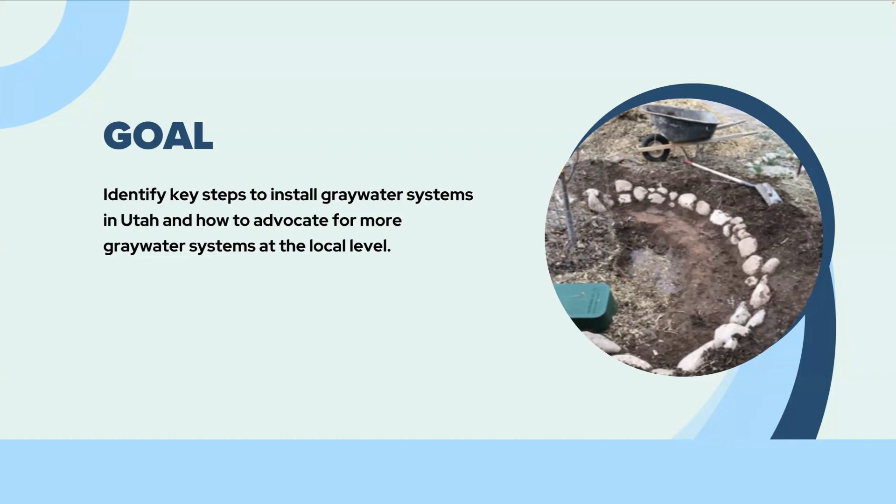Okay, so when you walk away from this talk, we're hoping that you'll be able to articulate what gray water is, list major aspects of Utah's code. Of course, you won't memorize the code, but maybe some major parts that are important to know about our code in Utah, which was revised in 2020 and simplified, made much more accessible for people right in the peak of the pandemic. And for you to be able to describe benefits and drawbacks of gray water systems based on our experience, visualize a branch drain system, which is what my system is in my household, recall major best management practices, and be a local gray water leader. So with that, I'll pass it over to Orion here to talk some about the gray water code.

All right. So within the health department, we are charged with regulating on-site wastewater systems, and gray water systems fall into that regulation. So there's R317-4, which is on-site wastewater systems. Most of you are going to know of them as being called septic systems, but gray water systems are quite a bit different from that. With the gray water system, and we'll talk about it more, what fixtures can go out there and whatnot, but gray water is a way to divert some of the water that would normally be going into the municipal sewer system. We can talk about septic systems later if we want to, but so that regulation falls into place.

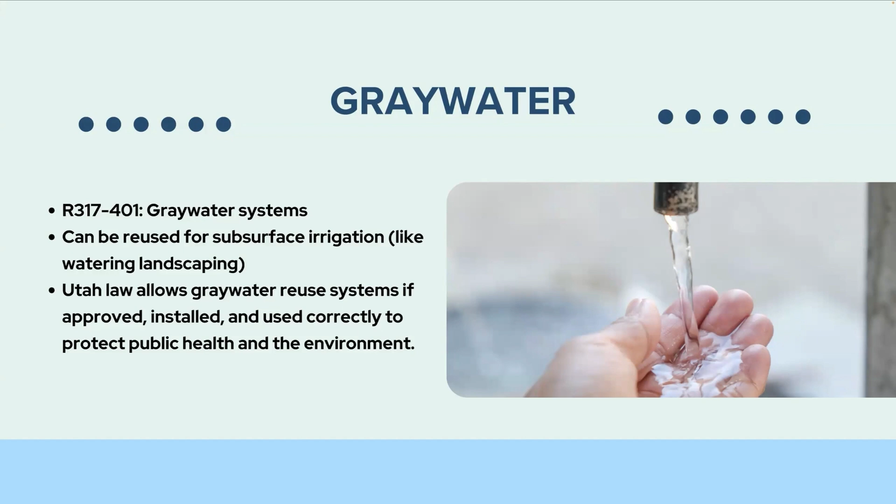And so after having chats with Roz and Jeff Adams, one of our other colleagues that we've worked on this with, I took it to the state to propose the idea of changing that rule, and then all of the other health departments, as well as mine, as well as the state DEQ, Division of Water Quality specifically, got together and rewrote the graywater rule to make it more accessible and feasible for people to actually be able to do it. And so I think that's probably enough background on that for this slide. We'll go into more of it, I guess.

So graywater specifically in Utah and many other places is defined as water coming from the bathroom faucet, laundry facilities, showers, and bathtubs. There's more slides that talk about this, but you'll notice that the kitchen faucet is missing, and that's because of the higher expected bacterial loads that would be going through that from food wastes and other such things.

Go ahead, Roz. Oh, yeah, sure.

So, before I move into some term definitions, I'll just say that Orion did lead the charge, which was incredible, in helping to revise that state code. It was a many-year process. It was approved in 2020, I believe. And that allows for these gravity-fed systems as opposed to the more complicated systems in the previous code requiring tanks and pumps and engineered plans and other things. So we'll go more into that as we dive deeper into what these systems look like and how they work.

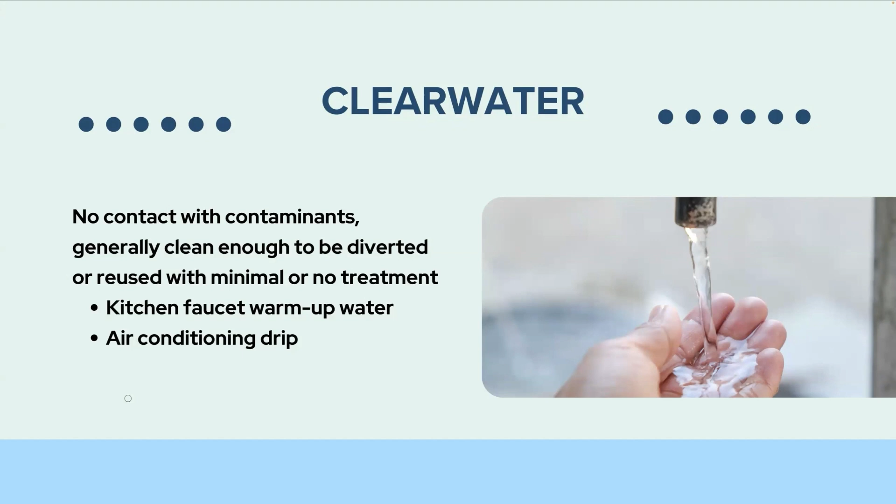So just to get our terms straight, let's differentiate gray water from clear water. Clear water includes water sources like heating up your water to wash dishes in the kitchen sink. While you're waiting for that water to heat up, many people, including myself, will fill up a container to water plants with. Air conditioning drip also counts as clear water. This is water that has not come into contact with contaminants, and it's generally clean enough to be diverted or reused with minimal treatment, as the slide says.

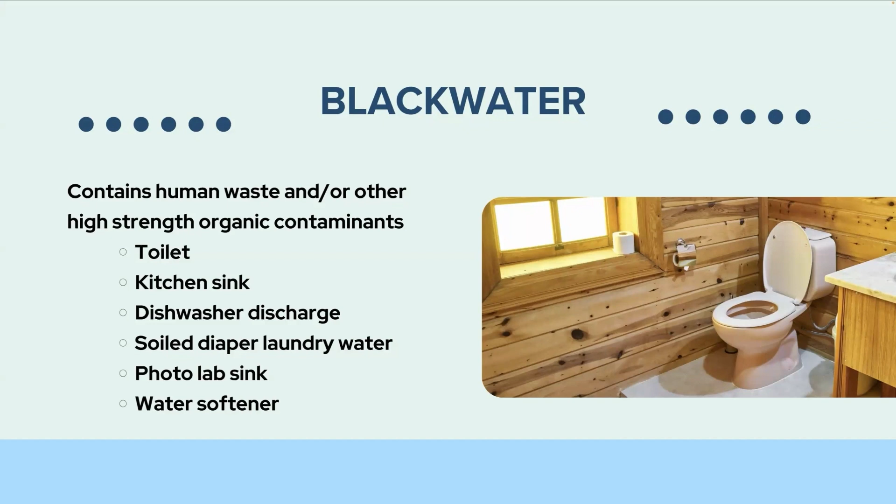Black water is not allowed in our gray water systems, and that includes contaminants such as human waste or other high-strength organic contaminants, including high counts of E. coli. So that includes the toilet, kitchen sink, dishwasher discharge, and soiled diaper laundry water. So your laundry could be used for gray water, but it also depends on what you're washing and what chemicals you're using, whether it needs to go to your septic or sewer system. And photo lab sink water and water softener water are considered black water in the state of Utah.

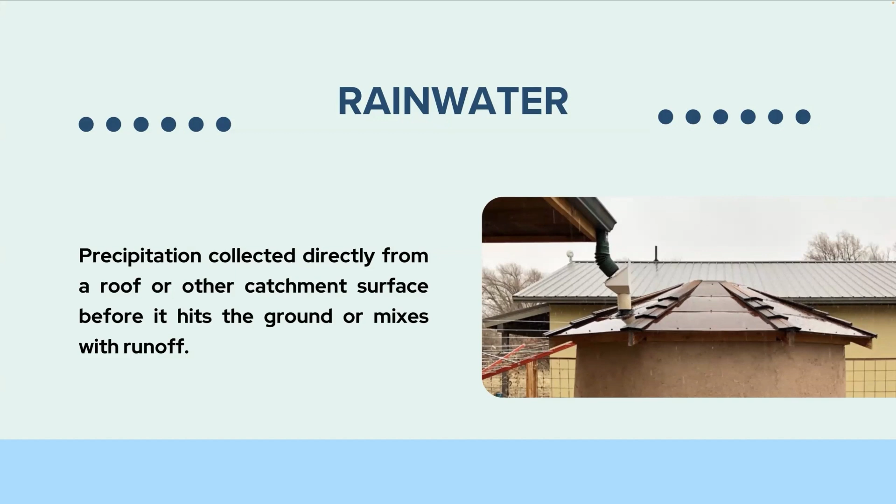Rainwater is precipitation collected directly from a roof or other catchment surface before it hits the ground or mixes with runoff. I harvest rainwater at my house. This is actually a picture of my tank. It's 750 gallons. You can legally harvest without a special permit in the state of Utah up to 2,500 gallons in above or below ground tanks at a time. That doesn't mean per year. It means you could fill up 2,500 gallons, use it, and then refill it in the next rain event and use it again. So I love my rain tank. It's pretty full right now from the last couple of rains we've had in Moab, and I'll be using that to water various fruit trees and shade trees in my backyard.

So Utah Code 73-3-1.5, not that you need to remember that, but in case you want to look it up, covers rainwater collection rights and registration, up to 2,500 gallons, and is approved for outdoor irrigation and non-potable indoor uses in the state of Utah.

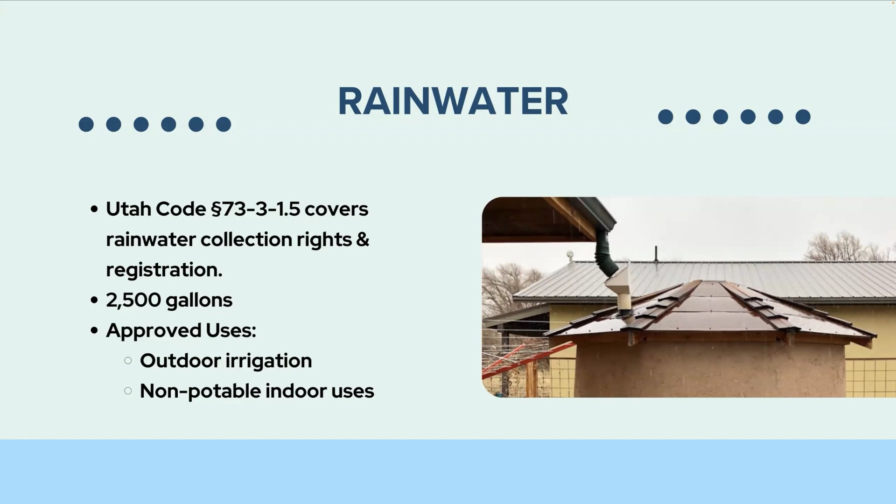Stormwater runoff is runoff that flows over land or impervious surfaces. We use stormwater runoff on the previous Moab campus, which is now the Free Health Clinic. We cut curbs and put in indented basins so that the parking lot runoff runs into them to grow shade trees for the parking lot. So this system is working in a more synchronous way than if we had a curb cutting off all that water flow into the stormwater system and then needed to put in municipal water to supplementally water those trees.

So we have shade trees growing in the parking lot that are on zero irrigation. They just depend on parking lot runoff with curb cuts and indented basins. I'll add to that. We also installed a similar type system for the stormwater here at the health department in Moab. That also went through curb cuts, went into these basins and all that. And we didn't have to water for like the last 3 years.

But now we got a new road in front of the building and most of it got torn out. So, yes, that was unfortunate. I saw that. So we're going to have to start over. But anyway, yeah, got the city on board. Yeah, we'll have to redesign that space at some point.

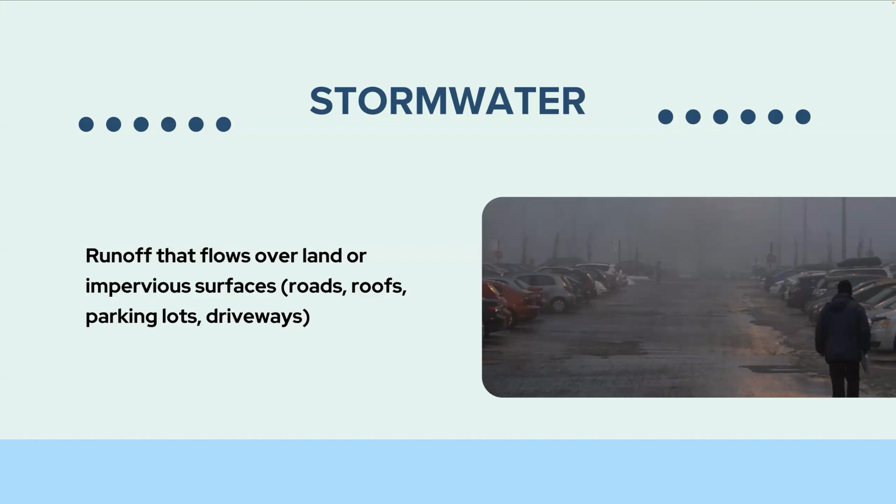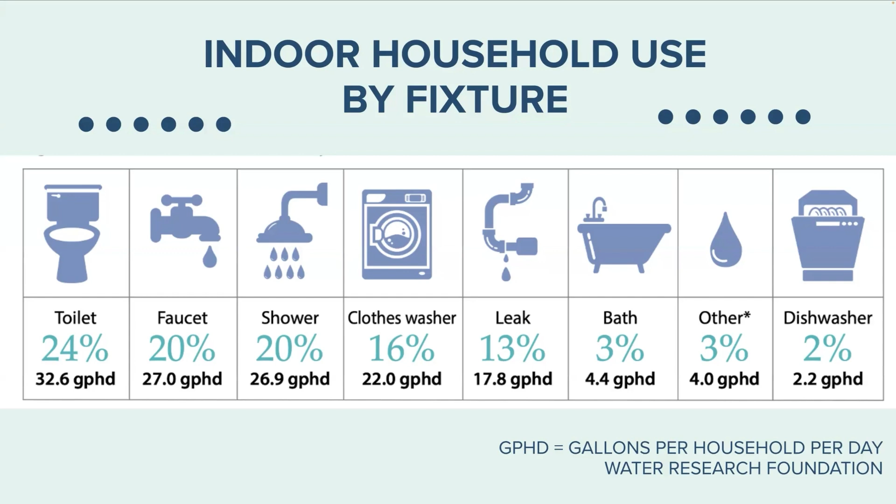If we just include the shower, clothes washer, and bath on there, you can see it's over 50 gallons per household per day. So this is a huge water harvesting potential into our landscapes if we had a Graywater system installed. So just to show you some of the potential there. So yeah, just some more about the rule, and I'll pass it to Ryan for this.

All right. So in the process of writing the rule, when I went into it, I essentially just wanted to write the rule specifically to gravity-fed Graywater systems like Roz has, because it's a lot simpler. There's a lot less complicated things. So there was some hesitation amongst other regulators on only going that direction, as well as other uses. So we identified the tier 1 versus the tier 2. Tier 1 are those gravity systems. It's supposed to be super simple, super easy, and very little maintenance.

Whereas a tier 2 system could be used in a multifamily situation or a commercial situation, or honestly on any residential home if you really wanted to. But I don't know why you'd want to have that extra complication. And in this case, one of the biggest fights to get the tier 1 is several of the other regulators were very insistent on having a tank before it went out to the landscape. Luckily, we were able to compromise with them and get this tier 1, tier 2.

So a tier 2 is going to have a surge tank. Think of it kind of like a mini septic tank. And then it's going to have some sort of treatment, drip irrigation. So these can be kind of neat in some ways if you need to pressurize to get to somewhere. But typically there's pumps, there's all this other stuff. And really the best application I would like to see a tier 2 go into would be like a hotel with lots of landscaping, something like that.

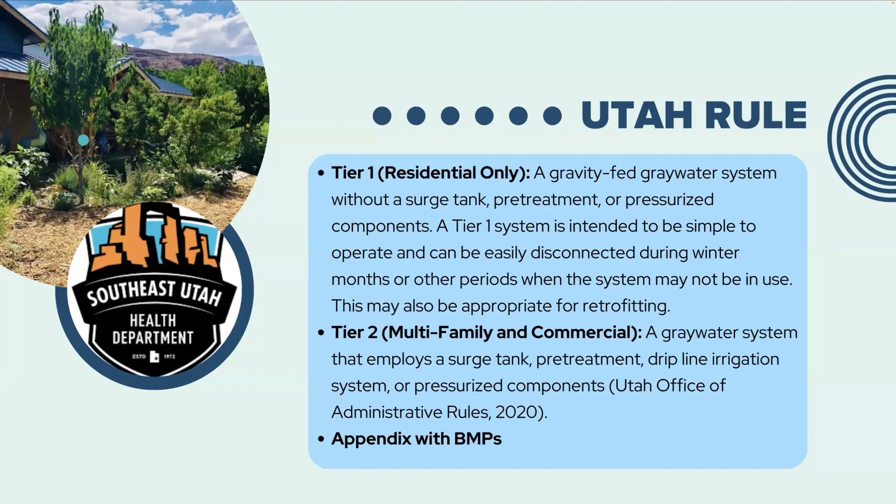And I like to tell people if it's harmful for your skin and your bacteria in your body, then it's probably harmful for your soil as well. So just as we go through the presentation, the saga of my cherry tree beside that outlet, this is that same cherry tree that I had planted when I put the system in back in 2015, so 10 years ago. And it's much larger than this now, but maybe it's a teenager at this point in the picture. So, okay.

Moving on. Okay, so we're speaking specifically to the tier 1 type system that I mentioned before, which, if I remember right, is just these branch drain gravity systems that you're talking about. But in order to put them in, we need to determine what our soil types are, which is going to dictate the size of the basin necessary to hold the expected water to go out. I mean, a clay is going to take the water on much slower than a sand, and really the sweet spots, if you have nice loamy sand or loamy soils, like Roz has here in this picture, that's kind of ideal. So anyway, the total square footage of the basin is determined by the amount of water being discharged, as well as the soil type, and that changes your size there, as well as many other aspects of the design.

One of the other parts that we have to do is there needs to be a way to divert to either your sewer system or your septic system, in the case that you're doing that load of non-disposable diapers, or you need to do a bleach load. I'm just speaking specifically to laundry right now, but if you're going to be putting something in the water that you don't want to go out to your landscape, there needs to be a way to go in between. That can be accomplished in a number of ways. Roz has a 3-way diverter valve in hers. If I had one around here somewhere, I would have held it up, but I forgot.

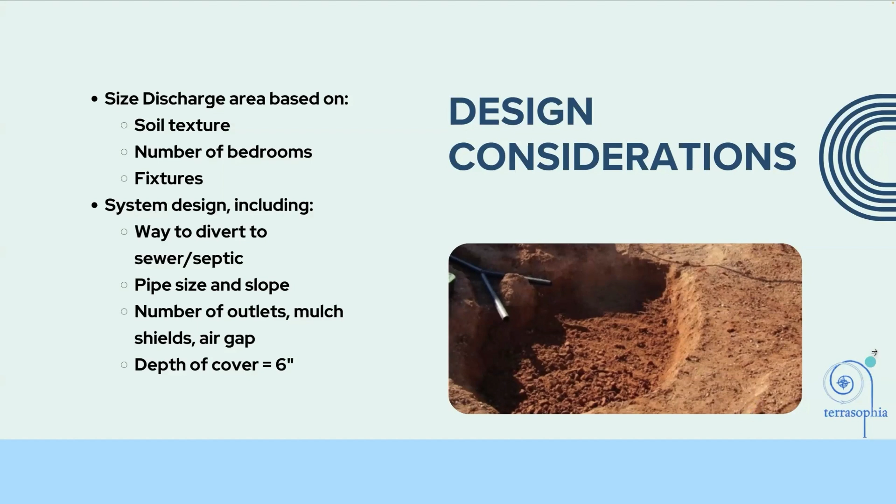You know the system, Ryan. Yeah, I know that system, and little did she know she'd work for me someday in the future. Yeah, that's right. So yeah, go ahead. Okay.

So this is kind of more of a learning moment in a way. Well, these are design considerations. So lot size and home design are super important when you're thinking about doing graywater on a new build. We have a really amazing low income housing project in Moab called Arroyo Crossing, and I've learned a lot from that one because it's a combination of stuff from the Housing Authority of Utah as well as a local nonprofit called Community Rebuilds, and these homes are in a land trust, and we were really excited to put in like 300 graywater systems, and then it turns out that the lot sizes were too small to be able to fit them.

And so it's something that we figured out along the way, and that's where lot size and home design come in. So even with a relatively small home on a small lot, part of our regulations are that the water has to be discharged 5 feet from the foundation of the home for pretty obvious reasons. You don't want your home sinking, but also you're not allowed to impact your neighbor. So the discharge is supposed to happen 5 feet from the neighboring property. And on some of these properties, there was only 10 feet to work with. So we had exactly zero space to put one in.

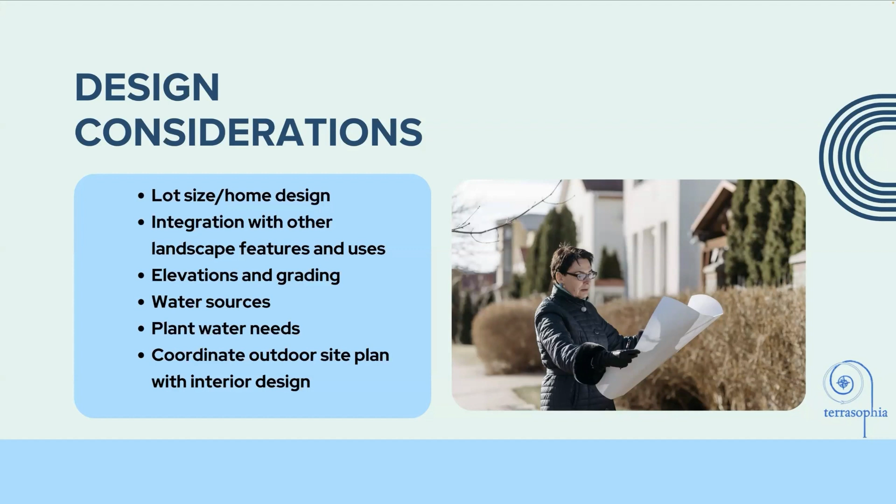And so you want to make sure that the least amount of distance from that three-way valve to your landscape, the better, because otherwise your pipe is going to be way too deep down. And mine's right beside my washing machine, and I do have a porch that it goes under as well. You'll probably see one of these pictures coming up.

So this is a picture from my gray water system, and just thinking through some of the benefits that I've observed. We've got additional benefits listed in our fact sheet. On one of the last slides, there's a QR code you can scan to access that fact sheet and read about Utah's code and what you can do to install that at your own residence.

So these gray water systems produce dark, intensely rich soil matter, and it's so effective that it does break down my mulch every 2 to 3, sometimes 4 years. I've had the system, like I said, for 10 years, and it's every couple to 3 years on average that I have to clean out the system. And why I have to do that is because as the mulch starts to break down, it doesn't allow that water to travel as efficiently throughout the basin.

And so I want that water to spread to more plants than just the cherry tree that's obviously very happy on that outlet. So I have 4 outlets in my branch drain system. And so 2 go to this basin you see in that picture with the wheelbarrow there. And then 2 outlets are in the far basin, which is to the west. And that is watering mainly a Utah giant cherry and a peach as well. And so this front basin has a Lapin's cherry and a nectarine.

And so I use that rich soil to fertilize plants in my backyard that aren't on the gray water system. And so that's a benefit that I've seen with my own system. It's a passive watering system. I'm a lazy gardener, I like to say. I'm mainly a perennial gardener and harvest mainly perennial edibles. And I'm also a full-time working mom.

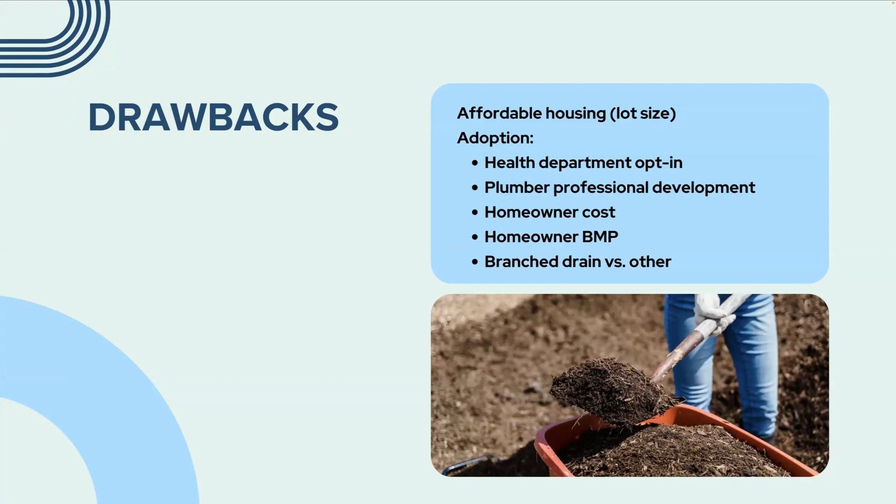I don't know if we addressed stubbing out elsewhere in this presentation, but stubbing out is a really good viable option that's inexpensive to at least make it possible for a home to do this in the future. I will just say that if you do stub out for a future system, know that a graywater system is not effective unless you're actually pulling it to the landscape. So keep that in mind to eventually pull it out to the landscape from the house, and don't keep it as a stub out. Otherwise, there's no sense having it at all.

Okay, so what's in a branch drain system? There's a couple main components for that. You have your source, which is of course the outlet. So for my system, it's the washing machine and the bathtub and shower, which are the same thing.

I didn't pull my bathroom sink. If I could turn back the clock, I would. At the time, I wasn't sure I was going to have kids, and my husband and I are pretty water wise, and we thought it would be too high of a salt load just from brushing our teeth. But now we have children, and we would change that if we could.

So the 3-way valve is another component we've talked about a handful of times. I've got a picture somewhere in here. Pipes and fittings are needed. Flow splitters are needed. Your discharge area, so your basin sized appropriately. The mulch shield. This picture of this graywater system, I'm not sure which system this is. It's just a picture that I had for a very long time.

These outlets are not sized large enough for Utah. So these are too small for an outlet. You want at least the 5-gallon bucket size, as Ryan said, or larger, and having mulch over top, and then your vegetation planned appropriately. And to clarify there a little bit, the reason that those are required to be 5 gallons now versus those ones that you can see there that are probably a gallon and a half is purely based on observations made at Roz's system.

They weren't functioning quite right, but when she made changes to her system and added 5-gallon mulch shields, things started working better. So we actually had hands-on experience changing that state rule through personal observations. So yeah, I'm really glad that those were increased, because what happens is with those smaller gallon or so size outlets, the root systems of plants will grow around that.

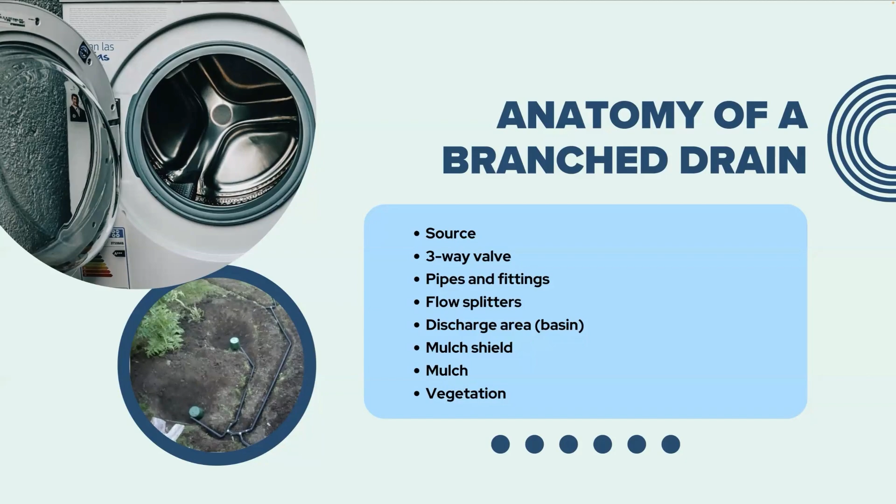Did you want to talk about this image, Ryan? Yeah, I can talk about it, but I'll also add to that, aside from all the stuff I mentioned before about the pooled water and human interaction, one of the other worries is creating places for mosquitoes to breed and causing other vector issues. So also pooled water, cockroaches, all sorts of fun stuff that nobody wants around their house. Especially when we're building something that could be a pest harborage if the water wasn't taken care of properly.

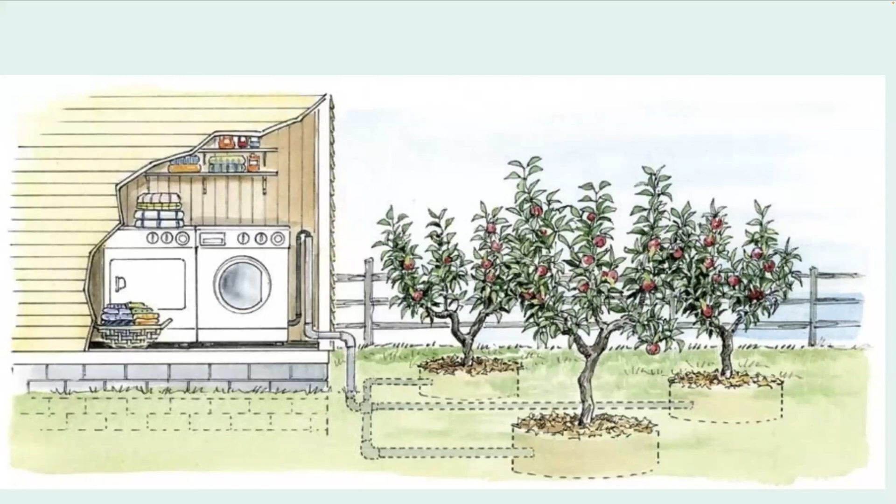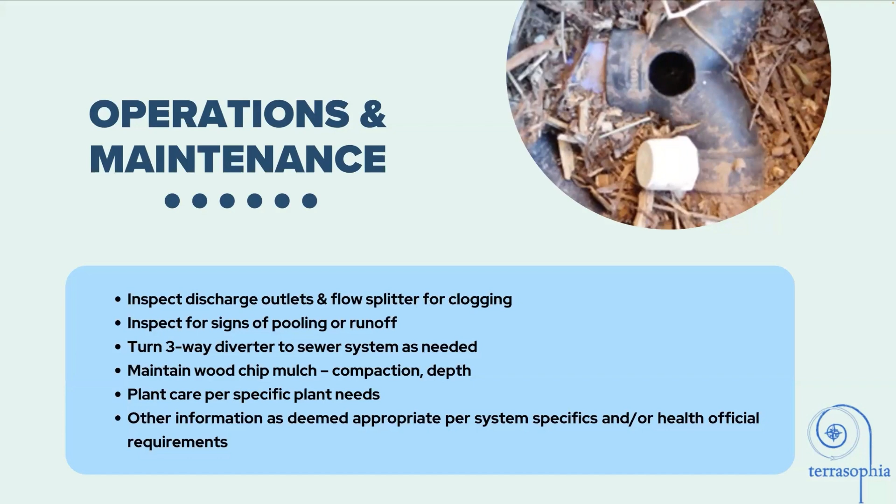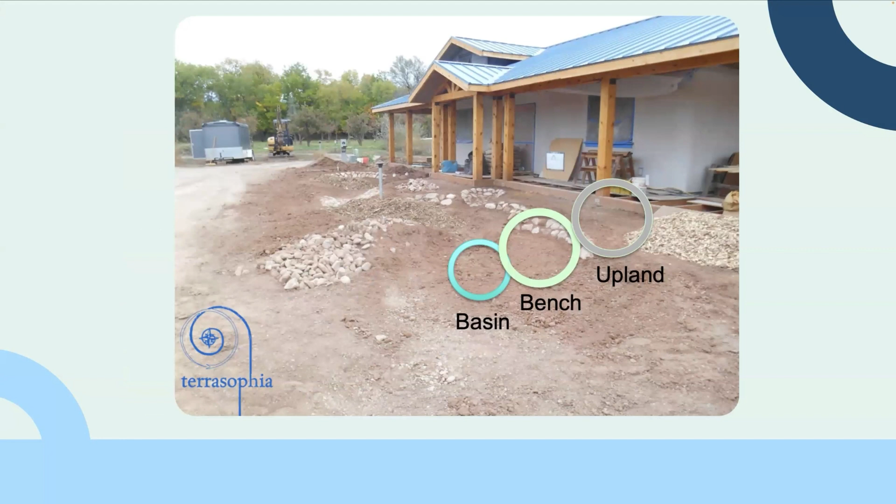Yeah. This is my system going in at my house. And so looking at the different plant needs, thinking about this is like the basin, you have the middle of that indented area, the bench in between, and the upland where you'd plant less water dependent plants. And so thinking about my plant scheme that way as the landscaping went in. Here you can see that purple pipe that Orion was talking about. My 1 inch outlet, which we discovered over time was too small in that west basin, which is beside the peach tree at the time.